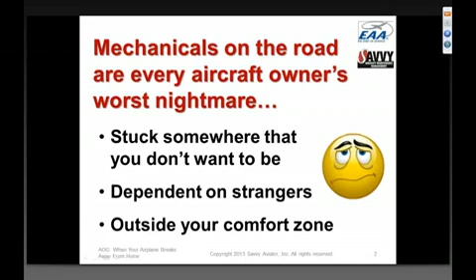So generally these are the sorts of problems that make aircraft owners the most uncomfortable.

My company manages the maintenance of about 500 owner-flown airplanes, plus or minus. We've done some research on this: our clients on average request breakdown assistance away from home about once every 2 years, plus or minus. So these things don't happen all that often to each person, but because we're managing about 500 aircraft, we have to deal with about 250 of these breakdowns away from home per year. So we have a lot of experience dealing with this stuff.

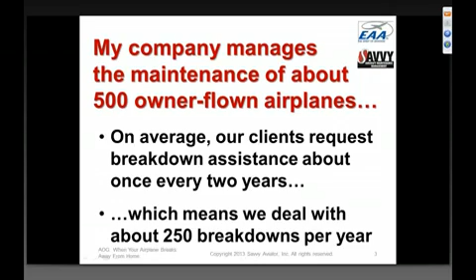Not quite one a week, not quite one a day, but several of these a week we typically deal with. And after you've dealt with hundreds and hundreds of these breakdowns, you start to learn a little bit about what the best way to handle them is.

One thing I've learned is that when we rescue one of our clients from a breakdown away from home, it's the sort of thing that causes them to be very grateful. This is a quote from one of my clients who emailed me and said, 'I always appreciate it when you save me thousands of dollars on my annual inspections and other routine maintenance, but when you help me out with that charging system failure during my recent fishing trip to Montana, that was truly priceless.'

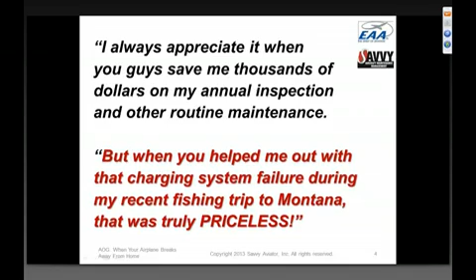So this is the sort of thing owners take very seriously, and when we're helping owners with these situations, we take it very seriously too.

Over years of dealing with hundreds and hundreds of these breakdown situations, I've developed a set of golden rules for how best to handle breakdowns away from home. They're probably a little different than you might expect, but they're rules we've learned the hard way from experience.

Normally the way I do these webinars is I'll talk about a bunch of case studies, and at the end try to derive some lessons learned. But I'm going to do things a little bit in reverse tonight—I'm going to tell you what the rules are up front, then I'll tell you a few stories about breakdowns we dealt with.

Actually 3 specific ones—some that we didn't handle very well, and you always learn the most from the ones you screw up, obviously. Some that we handled very well, some that were easy to deal with, some that were pretty complicated, just to give you a cross-section of the sorts of things that happen in these breakdown away from home situations.

I think you'll find that these 3 case studies I'm going to go through with you tonight illustrate some of these rules. The basic 3 rules I call the 3 golden rules of dealing with breakdowns away from home are these. The first rule is,

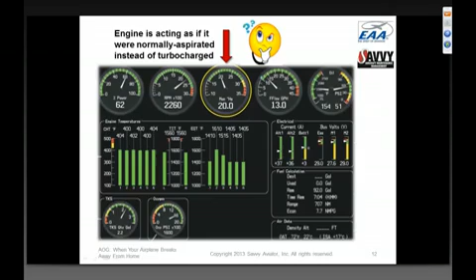When you do an annual inspection on one of these airplanes, one of the things you have to do is remove the intercoolers in order to gain access to the rear spark plugs and a bunch of other stuff. At the end of the annual, when they're putting the airplane back together, they reassemble the intercoolers, and they have to hook up these red flexible induction couplings that are held on with 2 stainless steel hose clamps.

It turns out that unless you are very careful at positioning those induction tubes just right and tightening the hose clamp on the correct side of that little bead, it looks like you got the induction coupling on, but as soon as the turbocharger starts pressurizing that duct, it blows the thing right off, and all of a sudden you've lost all your turbocharging, and the airplane suddenly acts like it's normally aspirated.

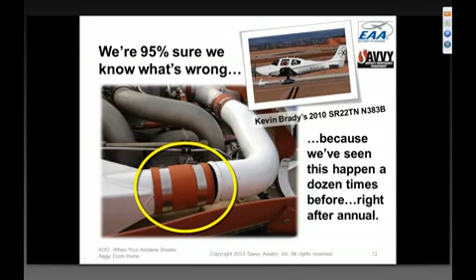But unfortunately, in aviation, 95% isn't enough. We still felt that there was a small but finite probability that it was something else. And that something else could be seriously dangerous.

For example, the loss of manifold pressure could be caused by a big exhaust leak. And a big exhaust leak is about the most dangerous thing that can happen in a turbocharged airplane because it can set the airplane on fire. So even though we were 95% sure we knew what was wrong, we weren't willing to take the risk of saying, Kevin, it's okay to fly home that way.

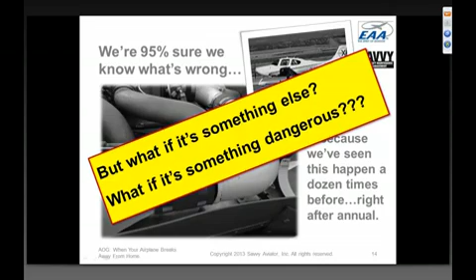We decided that we really needed to have an A&P take a look at it. Hopefully it'll turn out to be that induction coupling. It'll take 15 minutes to fix. He'll be good to go. And we'd be able to sleep at night.

So we looked at a map, and there were 2 Cirrus service centers in the general vicinity of Kissimmee. The nearest one was at Orlando. There was one a little further away at Tampa. Kevin decided he'd rather go to the closer one. So we called up the shop in Orlando. We said, we've got an airplane with an emergency. Could you squeeze him into the schedule? They said, sure, bring it over.

Kevin flies the airplane 10 minutes to the nearest Cirrus service center in Orlando. The service center inspects Kevin's engine, and they can't find anything wrong. In fact, we told them what we thought was probably wrong was a loose induction coupling at one of the intercoolers. They couldn't find anything wrong.

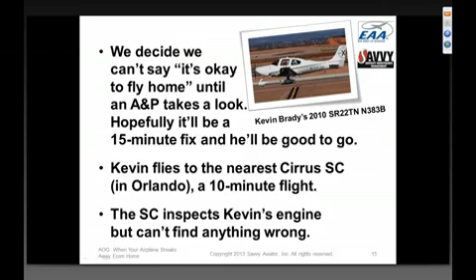Then something bad happened. The director of maintenance at the service center noticed that Kevin's airplane is still under warranty. So he took it upon himself to call Cirrus and say, we've got a 2010 Cirrus SR-22 still under warranty, got this problem, we can't find anything wrong.

Before you know it, Cirrus has arranged to ship a new wastegate and a new turbo controller overnight, about $5,000 worth of stuff under warranty. Whereupon the shop starts taking Kevin's exhaust system apart. He didn't tell Kevin, he didn't tell us, he just started taking the airplane apart. The next day, the FedEx guy shows up first thing in the morning with the new wastegate, the new turbo controller, and they install the new wastegate, they install the new turbo controller, they take the airplane up on a test flight.

And it's still the same as it was. Didn't help a bit. Now, had they consulted with us, first of all, we would have told them not to do it because the symptoms were not consistent with a problem with either a wastegate or a turbo controller. But they didn't tell us. They just went ahead and did it.

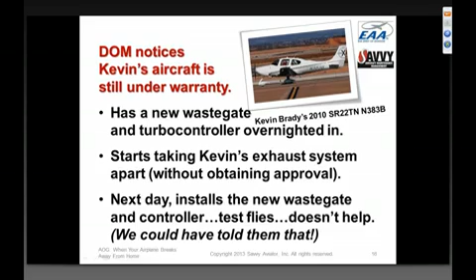So at this point, they call up Kevin and they explain what's happened, that they ordered all this stuff and they've taken the airplane apart and they put it back together and they took it up for a test flight and it still doesn't work. And Kevin is getting very upset. First of all, he and his family now have been stuck in Orlando for way longer than they planned. He's missed an important business meeting.

At one point he hollers, who's going to pay for this? And then he gets even more upset when he learns that the service center test flew his airplane without his permission, because Kevin is one of those guys who doesn't let anyone else fly his airplane but himself. And I understand that because I'm the same way. Nobody is allowed to fly my airplane except me.

And so he is now doubly upset with the shop. First of all, for taking apart his airplane and putting it back together without asking him. And second of all, for allowing somebody to test fly it without his permission. So ultimately, the service center pulls its chief inspector off annualing another airplane and asks him to inspect Kevin's airplane and see if the chief inspector can find out what's wrong.

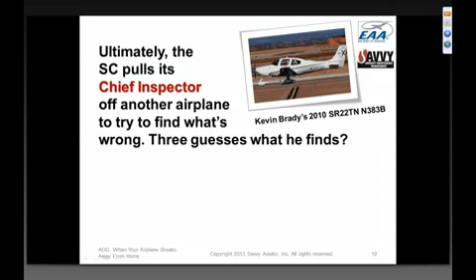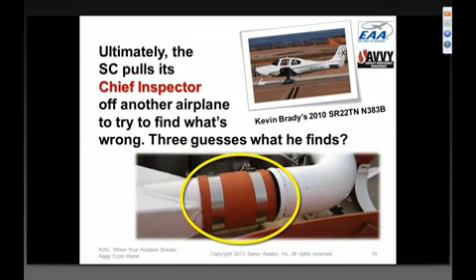Three guesses what he finds. Exactly what we told him was wrong. He found a loose induction coupling at the intercooler that the first mechanic, who was not nearly as senior, apparently overlooked.

So, some observations about what happened here. And this obviously didn't go very well. The service center was totally fixated on fixing the airplane, and it never considered Kevin's needs or wants. The service center assumed it could do whatever work it chose to do on the airplane because it was in warranty and Kevin wasn't going to have to pay for it.

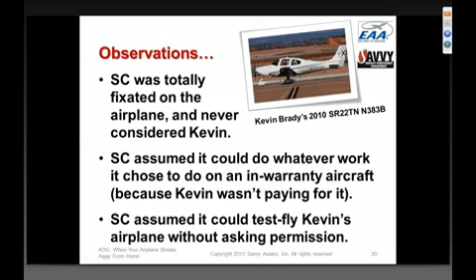Bad assumptions. The service center assumed it could test fly Kevin's airplane without asking his permission. Again, that infuriated Kevin. But this sort of decision-making is stuff that we see all the time, because mechanics tend to fixate on the airplane, not on the airplane owner. And that turns out to almost always be the wrong thing.

The service center in general assumed that Kevin would be thrilled that they fixed his airplane. But instead, Kevin was furious that the service center did all of this stuff, including flying his airplane, without his permission. And because they did all of this stuff that they weren't authorized to do, he and his whole family wound up being stuck in Florida for a week that they hadn't planned on.

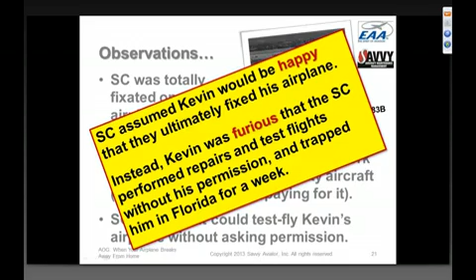So we learned some lessons. We screwed up by, not intentionally, but inadvertently giving the service center essentially a blank check to troubleshoot the airplane. What we should have done, and we all of us on the Savvy team had a meeting after this to discuss this. We should have instructed the service center something like, please spend no more than 2 hours troubleshooting this issue and then report your findings.

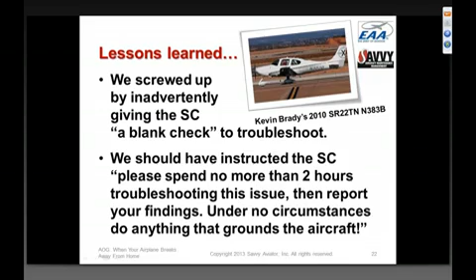And under no circumstances do anything that grounds the aircraft. Had we been smart enough to tell the shop that, then all this other stuff wouldn't have happened, and Kevin would have been a much happier camper. But we made a mistake, and we learned a big lesson from that.

The objective should not have been to fix the plane. It should have been to get Kevin and his family home safely as soon as possible. And we have a slogan for that: owner first, airplane second. Mechanics tend to fixate on the airplane. We try very hard, and we didn't do a very good job this time, but we try very hard to fixate on the owner. What are the owner's needs? What is it going to take to make the owner happy? Not to make the airplane happy, but to make the owner happy.

One week later, about 200 nautical miles to the northwest, Gary Troop has a 2009, almost an identical airplane, one year earlier model, again under warranty. He calls in, AOG in Tallahassee, Florida. He was about to launch for his home base in Destin, Florida, not far away, and discovered he can't get the engine started. We asked him for the symptoms. He said when he tries to crank the engine, he can hear the starter making noise, but the prop only twitches and won't really turn over.

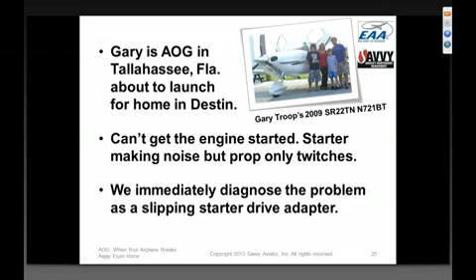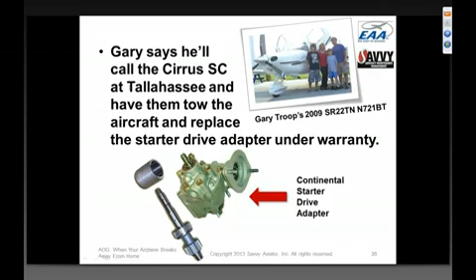So as soon as we tell Gary that his problem is a slipping starter drive adapter, he says, 'Oh, fine. There's a service center here on the field at Tallahassee. He'll call them, have them tow the airplane over, and replace the starter drive adapter under warranty.' The natural reaction that almost any owner would have under these circumstances.

We say, 'No, Gary, do not do that,' because we happen to know that Continental is 10 days back ordered on starter drive adapters. If he puts his airplane in the shop and says change the starter drive adapter, his airplane is going to probably spend two weeks in Tallahassee. And we don't want Gary stuck in Tallahassee, because we're owner first and airplane second.

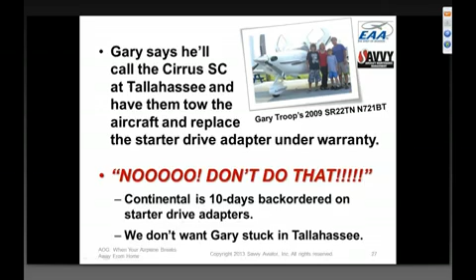So instead, we tell Gary to call the FBO and ask them to bring over their 28-volt ground power unit. We know from experience that when a Continental starter drive adapter starts to slip during normal starts on the ship's 24-volt battery, it's still usually good for a few more starts if you hook up the airplane to 28 volts, where the starter motor has a little more oomph. We explained that if he can get the FBO to hook his airplane up to a 28-volt cart, there's an excellent chance he'll be able to get the airplane started.

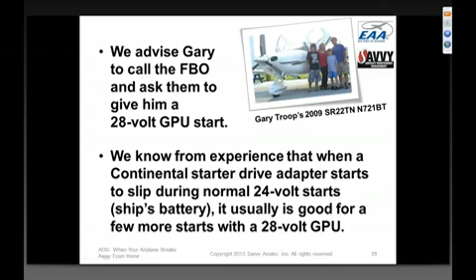He'll be able to fly home to Destin. He was trying to get home in time for dinner. And then we can deal with the starter adapter problem back at his home base, where everything is a lot more comfortable for everybody.

The next thing that happens, about 20 minutes later, Gary phones us from the cockpit on his cell phone. We can hear the engine noise in the background. He says the engine started fine on 28 volts, and he's about to launch for home. As soon as we get off the phone with Gary, we contact his home service center in Destin and ask them to order a replacement starter drive adapter. Gary makes it home for dinner, and everybody's happy.

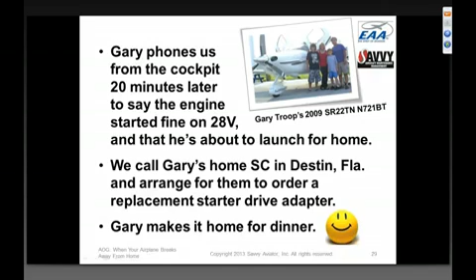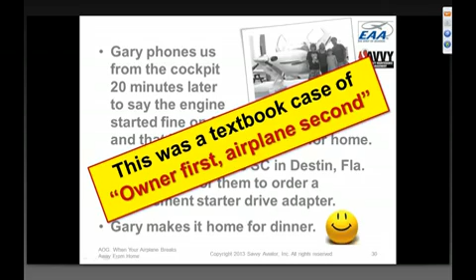So again, this one was a textbook case of owner first, airplane second. The owner's natural impulse was to put the airplane in the shop. But we knew if he did that, he wasn't going to be happy, because his airplane was going to be tied up for two weeks, and he'd be stuck away from home, having to find alternate transportation to get home, and then alternate transportation to get back to pick up his airplane two weeks later. So instead of focusing on fixing the airplane, we focused on getting Gary home, and it had a happy ending.

Fast forward to last Saturday, and this is the third story I'll tell you. This one's a little longer because it got a little more complicated. Actually, this is a pretty hairy one. But again, it illustrates a lot of important issues with regard to breakdowns away from home.

This is a story about a Cessna 185, a 1980 Cessna A185, owned by a fellow named Mark Balocco, who lives up in the San Francisco Bay Area and bases his airplane at a little airport called Byron. He and his wife flew the airplane from his home base airport to Minden, Nevada, up in the high Sierras, a little south of Reno, to take care of his sick mom who lives up there.

A few days later, they went back to the airport, got in the airplane, and when he started the engine to depart for home, there was no oil pressure.

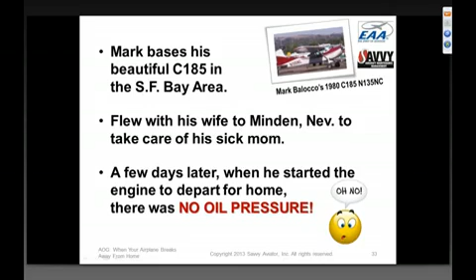This is not a good way to start a trip home. There was only one A&P mechanic on the field at Minden, so Mark called him. They took the airplane over to his shop.

The A&P hooked up an external pressure gauge to the engine, started it again briefly, and verified that there was really no oil pressure.

It wasn't just the gauge that wasn't working, which I could have told him, because the gauges in the Cessna 185 are old-style direct reading gauges where there's actually an oil line that runs right into the cockpit and hooks to the back of the gauge. There's no electrons, no sensors, no connectors or wiring harnesses, and those old direct reading gauges never lie. If they say there's no oil pressure, you can take it to the bank that there's no oil pressure.

Anyway, the A&P verified that there really was no oil pressure. He then proceeded to cut open the oil filter and told Mark that there was significant bearing metal in the filter, that was a direct quote, and that his engine would need to be torn down.

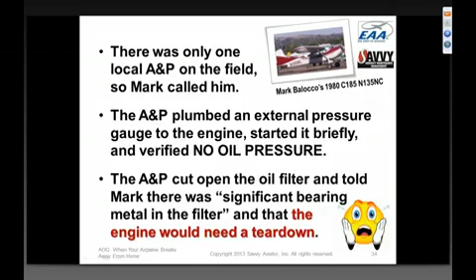The A&P then disappeared into his office for a few minutes and emerged with a written estimate for engine removal, teardown, and reinstallation that totaled something north of $10,000.

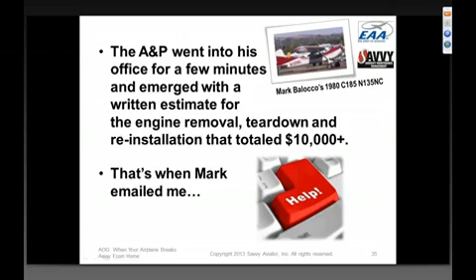Mark is having a really bad day now, and he decided to email me. Fortunately, I was checking my email pretty compulsively that morning, and I saw his email literally within minutes of the time he sent it to me.

So I emailed him back and said, Mark, could you take some photos with your iPhone of the metal that this mechanic saw in the oil filter and send the photos to me, so I can get some idea of what this mechanic is seeing in your oil filter - significant bearing material, metal in the oil filter.

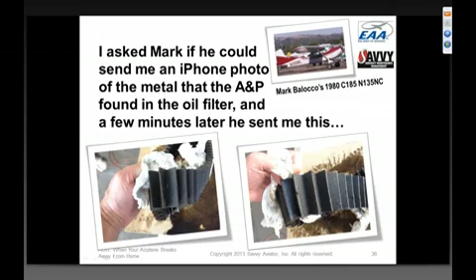So a few minutes later I get an email back from Mark with some nice pictures of the oil filter. Took a close look at them. Filter looked pretty clean to me. Looked at another picture and magnified it way up. I saw a few little flecks of metal, but nothing I would call significant.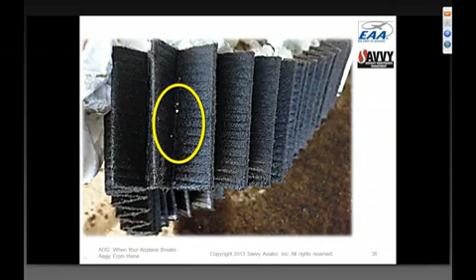We have rules of thumb about how much metal in a filter is important and what you do. In fact, my webinar next month is exactly on this subject - we'll get into a lot of detail about when you find metal in the filter, exactly what you do. But in any case, I looked at the photos Mark sent me of this filter, and I went back to him and said, sure doesn't look like significant metal to me.

So I started asking him some questions. I said, are you sure there's oil in the sump? He said yep, first thing he did was check the dipstick and there was plenty of oil. I said, well, if you've got plenty of oil in the sump, there's about a 95% chance - here we go again - that the reason you don't have any oil pressure is...

...because there's some contamination in your oil pressure relief valve. The oil pressure relief valve is a little spring-loaded thing that sits on the back of the oil pump, and its purpose is to regulate oil pressure. If some foreign material somehow gets into the oil pressure relief valve and prevents the plunger from sealing properly against the seat - it's a little steel spring-loaded plunger that sits against a brass seat - if there's any foreign material in there that prevents the valve from fully closing, then you won't get any oil pressure when you start the engine.

And even if you ran the engine up to high RPM, you'd get some oil pressure, but not an appropriate amount. Obviously, when you start an engine and don't see any oil pressure, you're not going to run it up to high RPM unless you're pretty dumb. So I said, I'll bet you a steak dinner that the reason you don't have any oil pressure is because there's some little piece of something in your oil pressure relief valve.

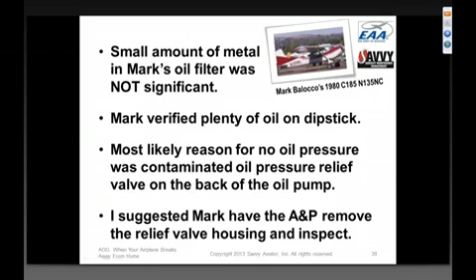Short time later, he emails me back, then texts me, and sends a picture saying, you're absolutely right, we found a little piece of metal lodged in the pressure relief valve, here it is. The mechanic said this is just one more indication that we need to tear down this engine, something is coming apart big time.

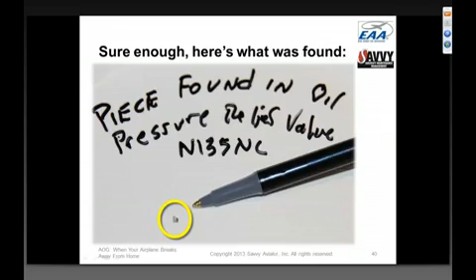So I took a look at the piece of metal and asked Mark some questions. I said, is it ferrous or non-ferrous? He said, how do I know? I said, take a magnet and see whether it sticks. He texted back that it does not stick to a magnet, it's non-ferrous. I said it looks kind of silvery in the picture, do you agree, is it silvery or coppery colored? He said it's silvery colored. I said, if it's non-ferrous and silvery, pretty much the only thing it can be is a little piece of aluminum. I'm not concerned about a little isolated piece of aluminum, unless there are a bunch of its brothers and sisters floating around in your oil pan. But it's just one little piece like that, I wouldn't be too concerned.

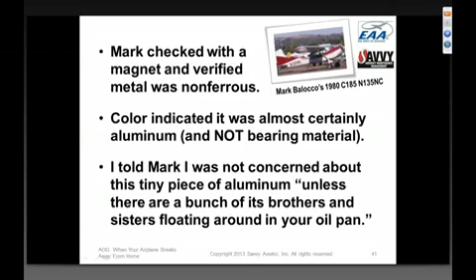The A&P is still insisting the engine needs to be torn down, and Mark is starting to panic. He texts me, Mike, what can I do? Can this A&P ground my airplane? Can he hold it hostage until I agree to the $10,000 plus teardown?

One of the things I find a lot in these breakdown-away-from-home situations is that owners get very emotional and very frightened. They're dealing with strangers, and in this case, a stranger who wants the airplane for a month or two and charge them over $10,000 to fix it.

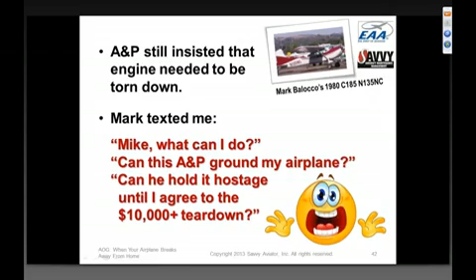So I told Mark not to panic. I asked him a few more questions, and learned he was pretty handy with tools, one of those aircraft owners used to doing his own oil changes and other preventive maintenance. I said, this is a good situation.

So I suggested to Mark that he tell the A&P to put the airplane back together, get a logbook entry for the work performed so far, pay the bill, and get the plane out of there before the A&P took anything else apart. Because this A&P was clearly bound and determined to tear down this engine, and from everything I was seeing, there was no earthly reason to do that.

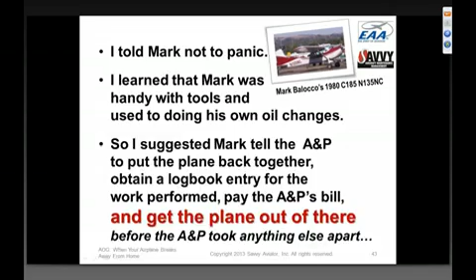So Mark did what I told him: told the A&P to put the airplane back together, give him a logbook entry, give him an invoice that he would pay. The mechanic was not very happy about this, and gave Mark a rather nasty logbook entry.

I don't know if you can read this, but some of what it says is found large ferrous chunk on relief valve seat, and Mark had verified it was non-ferrous, and I could tell it wasn't large. He also said he found significant metal contamination, including fine bearing material and ferrous particles. Again, I looked at high-resolution photos, and as far as I was concerned, the amount of metal in the filter was totally insignificant. We'll talk about that in next month's webinar.

He wrote, owner advised of engine condition, engine ground run by owner, because the mechanic refused even to run the airplane on the ground. He was basically saying, I'm not taking responsibility for this thing. So the logbook entry is kind of nasty, and basically said, I told him not to run the engine, but he did it anyway.

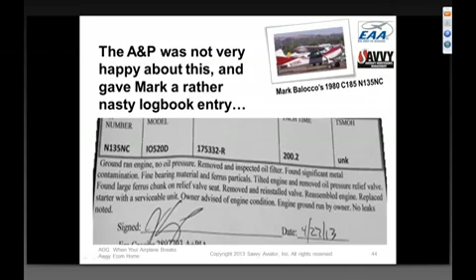Now let me point out that mechanics are not supposed to do that. The regulation defining what's supposed to be in a logbook entry, FAR 43.9, says a logbook entry is supposed to contain only the date, the mechanic's signature, and quote, a description of the work performed. It's not supposed to talk about any discrepancies found or contain editorial comments, just a description of the work performed.

Some A&Ps can't resist making editorial comments. Mark was kind of upset about this logbook entry. I told him, don't worry about it, just pay his bill, get the airplane out of there, and then we'll deal with the problem once we get it out of this shop.

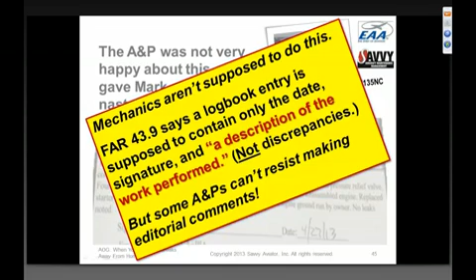Also, this wonderful mechanic insisted on being paid with a cashier's check. So poor Mark's wife had to run into town, go to the bank, and get a cashier's check to pay this mechanic. But at any rate, finally, the airplane was out of jail.

Mark started the engine and gave it a brief run-up. The oil pressure was now just fine. I had no doubt about that because we found why the oil pressure was zero. We had a little piece of foreign material in the pressure relief valve. With the foreign material removed, the oil pressure was fine.

In fact, the oil pressure was actually a little bit above the top of the green because the oil was cold. But as the oil warmed up, the oil pressure went right to about 50 psi, right where it's supposed to be, about 2/3 of the way up the green arc.

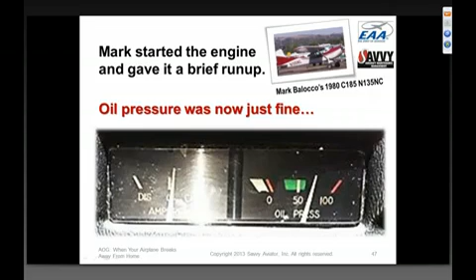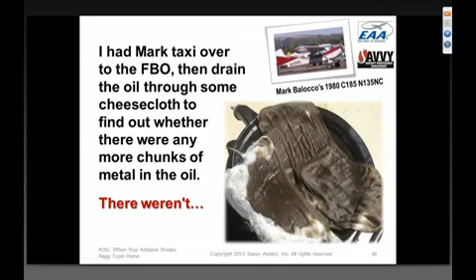So I had Mark taxi over to the FBO, and then I asked him to drain the oil, which was now nice and warm, through several layers of cheesecloth in order to find out whether there were any more chunks of metal floating around in the oil pan. You remember the brothers and sisters I was talking about. So he drains the oil through the cheesecloth, which is sort of a messy procedure, but it needed to be done. He carefully inspected the cheesecloth and determined there was nothing but cheesecloth and oil there. There was no metal, which was what I was hoping to find.

At this point, I had Mark service the engine with fresh oil, and then go out and perform a 30-minute ground run, varying the RPM between idle and 1700 RPM, which is the normal run-up RPM for a Continental engine, for about 30 minutes.

The oil pressure was perfect and nice and steady. When he reported that, I said okay, now go down to the end of the long runway, which at Minden is 7,400 feet long, and go to full power and do a high-speed taxi test down the runway, kind of a rejected takeoff, so we can make sure everything works fine even at full power. I don't like to do full power static run-ups because it's very hard on the engine, but I had him do it while he was rolling down this long runway. He said everything was fine, and finally I had him taxi back to the FBO.

He's texting me like crazy from the cell phone while he's doing all this stuff.

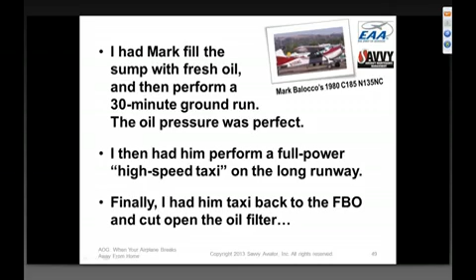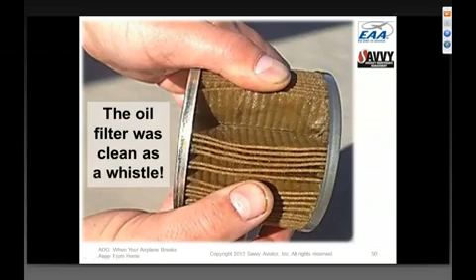And shut down the engine, take off the cowl, and cut open the oil filter, and tell me if he finds any metal in it. So he did, and he inspected the filter carefully and sent me pictures of it, and the filter was absolutely spotless, no metal in it whatsoever. Obviously it was a nice light color because the oil in it only had about 40 minutes on it, but there was no residual metal either in the cheesecloth, which would catch the big stuff, or the filter, which would catch little stuff. Everything was just clean as a whistle.

At this point, I said to Mark I was now comfortable with his flying the airplane, and wanted to make sure that he was comfortable. He said he was. So we decided to fly up the valley to Carson City Airport to spend the night, which he did. The flight was uneventful; the oil pressure was rock solid.

Then first thing the next morning, he took off from Carson City, crossed the Sierras, following I-80 just to be on the safe side, and continued home to the Bay Area. The engine performed flawlessly. When he got home, he cut the oil filter again, and it still was clean as a whistle.

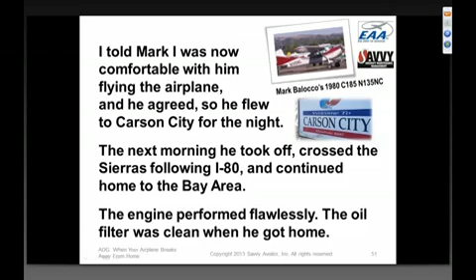And that was the end of the story. So again, owner first, airplane second, and Mark was a very happy camper.

At any rate, I think this illustrates some of the things I'm talking about. Again, the 3 rules: don't put your airplane in the shop until you diagnose the problem. Of course, Mark immediately put it in the shop, which is what most owners just reflexively do, but you don't want to do that. You want to figure out what's wrong before you put it in the shop. He called me, I diagnosed it within 30 seconds, and he could have done that before putting it in the shop and not having to go through all of this agony.

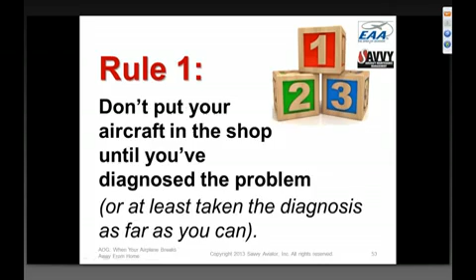Rule 2: don't perform maintenance away from home base if you can possibly avoid it. In this case, he actually couldn't avoid it because somebody had to clean out the pressure relief valve, and although Mark was very handy with tools, it's technically not legal for a non-A&P to do that. Everything I asked Mark to do was legal for an owner to do as preventive maintenance, but opening up the pressure relief valve is not something an owner is allowed to do, so you need to get an A&P.

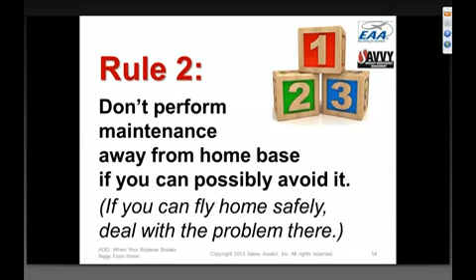In a perfect world, he would have taken it into the shop and asked the mechanic, please open up the pressure relief valve and inspect it for foreign material, and hopefully limited the mechanic's involvement to doing exactly that.

And rule 3 is, if maintenance is unavoidable, do the absolute minimum necessary to fly home safely, which is precisely what we did. We kept what the mechanic did to a minimum, although the mechanic obviously wanted to do the maximum, and got the airplane out of there just as quick as we could.

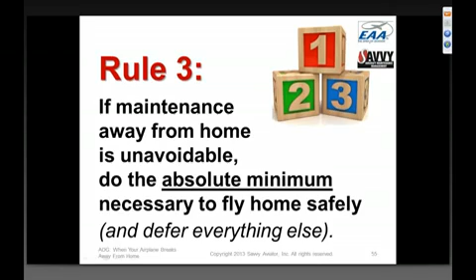So that's it. Looks like we're going to have plenty of time for Q&A, Tim.